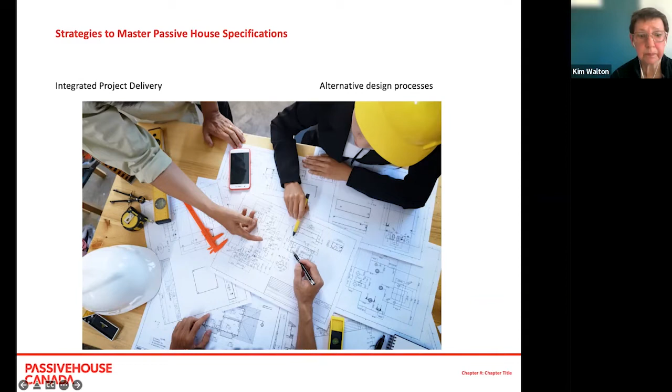That's a lot of words for just one picture, hey? So this is something that you have to get in your head when you're thinking about Passive House, that this is a whole building process. 1 + 1 almost never adds up to 2. 2 + 2 sometimes is 1.

Unless things are modeled, unless the energy modeler and the Passive House consultant is on top of all of the decision making all of the time, then problems can arise pretty quickly, and you can be well into a design where things are just going sideways, and there's some decisions that have been made that will destroy the possibility of a building becoming certified, if that's the goal.

So inexperienced teams might imagine that all that's needed for a Passive House certification is to add more insulation. Not true. And European windows and tape, and that ends the design process. And it's true, some of those things are used, and sometimes that's what we want. But the reality is that the design of the building has to be integrated. It's an integrated process. The Passive House consultant will make the initial suggestions for the success of the project, and will work with the team as well as the certifier in helping to guide design decision making.

So the active use of the PHPP or energy modeling process and software will let the team know if the project is on track for certification, and in the end, the specification of the materials will be key to the success of the build. So if something's not available, or we can't get something in Canada, then that's a big deal, and that's going to assist the Passive House consultant in the submittals, because in the end, if the project is being certified, there's an awful lot of submittals, and you need to know what the performance values are, and that is an important part of the certification process.

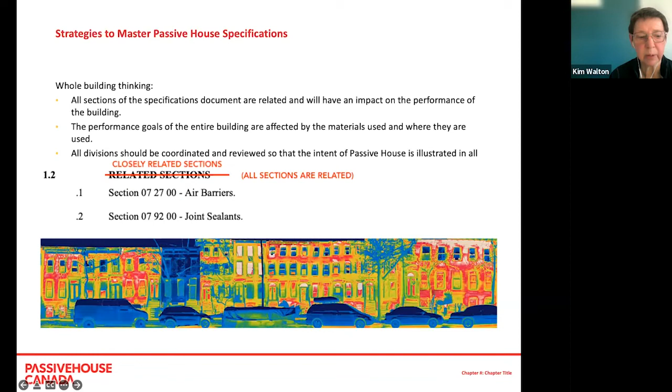And I'm just going to go back one. We want to be the blue building. That's the idea. This is about thermal bridging. This whole photo is showing a block of buildings that are just not performing very well, but the blue building's doing really well. That's what thermal bridging is all about. But how do you get it? You can't just specify no thermal bridging. That doesn't happen. But some of the materials that get you there are the important part.

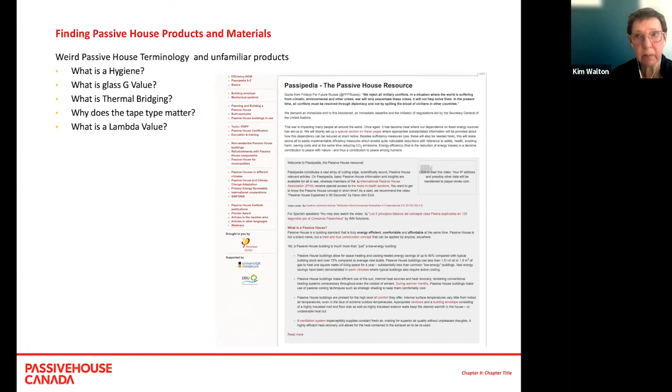Why does one tape matter over another tape, and what is a lambda value? So some of those things are very difficult to explain. I'm not going to explain them all well in this conversation, but there are resources, and at the Passive House Institute, there is something called Passipedia, and that's where you can hunt and look for some of these terminologies so that you can better and quickly understand what they all mean.

So just because I brought up some of those terminologies, I think hygrothermal is the most kind of weird one in the English language, because we think of hygiene as something completely different than what this is. So it's not about washing your hands. It's not about cleaning things, but it's about condensation, and it is a very important part of considering using the right products so that we are not creating conditions that would promote mold growth.

The G value has a different name in North America. We call it a solar heat gain coefficient, but it's really talking about the films that are on the glass and how the glass performs in the building.

What is thermal bridging? I think I gave you a little example in an image, but this is the technical example. And if you really want to know what the formula is, there it is on the screen for you. And why does the tape matter? It really matters because some of it's permeable, some of it's not permeable, some of it has an acrylic backing, and sometimes a tape matters much more in one location than another, and one type of tape in another.

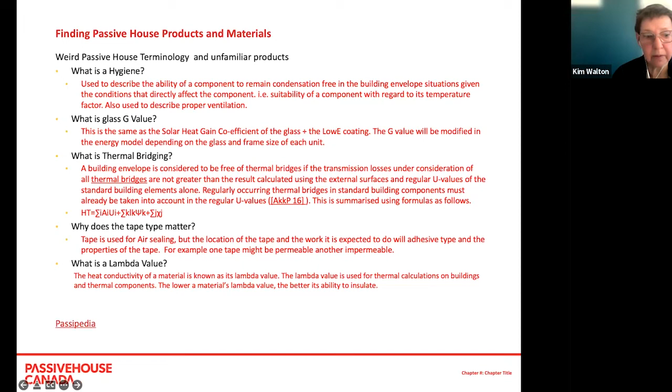And that's what you depend on the energy consultant and the experienced team members to let you know as a specifier. The heat conductivity of a material is known as a lambda value. And it's so important to know what the lambda value is if you're doing energy modeling. And it's also going to be important to know when you're specifying some materials, because it's going to be part of the whole assembly and part of how we certify a building.

So when Lori and Kelly and I started talking about this, the first thing that came out of, I think it was Kelly's mouth, was what? And what is this? And what? And that's really the big deal. So if you're thrown into a project and you need to find materials, how do you find these materials, and what does all of this mean?

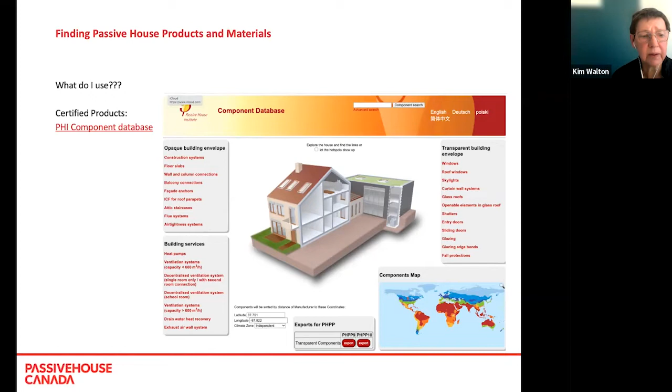So the easiest thing to do is to go to the Passive House Institute page, and there is a component database, which is really pretty easy to use. And there you can find components that are certified, and it's the best place to start, even if, and I'll talk about this later, not everything is certified, but this is the best place to start, the component database.

And I've just selected some components of a building, and these have to do with keeping cladding away from the building and doing some of the thermal bridge free construction. And I was looking in this search for some things that are available in Canada. So it is completely possible to sort for things that are available in Canada. And then you can also search for the climate zone. So the climate zone where you are, in Nova Scotia, is cool and temperate, and where I am, it's cold. So you can sort based on those things as well.

And then you can find these products. This isn't always the case. You might not be able to find something that fits the climate zone and the location, but this is a good starting point. And then this is the kind of information that you get when you click on a product. So it's giving you the component ID and the manufacturer and the quality, all of those things. These are important parts of specifications for certification. So that's why you want to find this information.

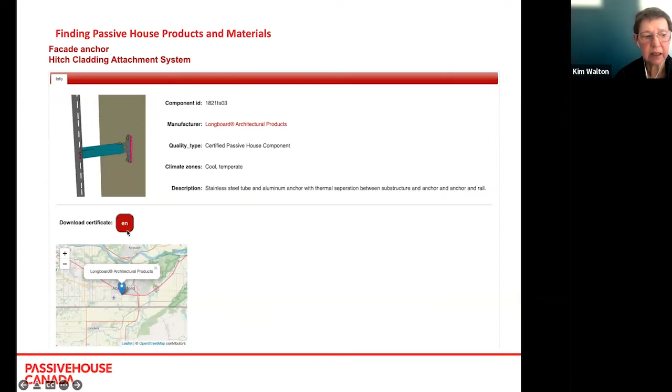When you click on the certificate on this site, then that gives you this certificate, and this is what you want to hold dear in a file. The certificate gives you all of the information that is actually needed when you do a compliance or when you're doing certification. It'd be part of the folder or part of the information that's provided.

But what might happen is that you may not be able to find a certified product, but something that's close. And what you want to do is prove that this product is going to work in your climate, and in that case, if it's not certified, this is the information that you're looking for from the product and from the manufacturer in order to have it part of the certified building.

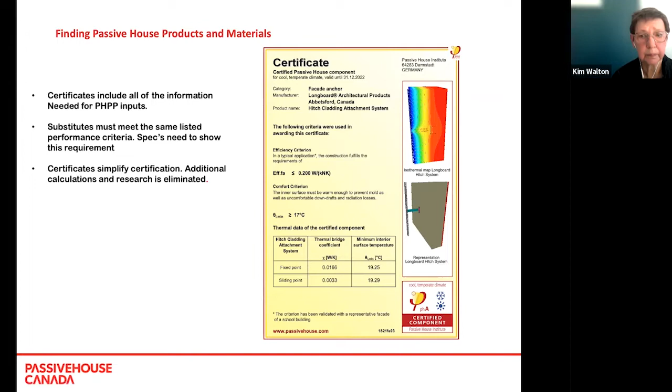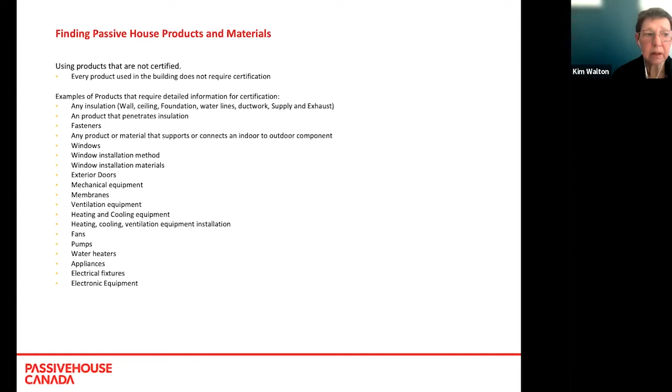So more about finding products. Not every product is certifiable or certified. These are some of the examples of the products that require detailed information when you're going for certification for Passive House. And this is a long list. This is just a partial list. But these are some of the things that we need to find the performance for. And maybe a quarter of them may not be certified when you're doing the application, just because you can't get the product, or it's not made in North America, or all kinds of reasons, one of them being budget, of course, too.

So for uncertified products, third-party testing is required for energy efficiency and for the performance, that they're climate appropriate, for the thermal resistance and the permeability. The information that the certified products provide is a reference for acceptable alternatives, and this is the information that's needed by the energy advisor for modeling. So this is where the energy advisor is leaning on the certifier or the specifier to help find these products.

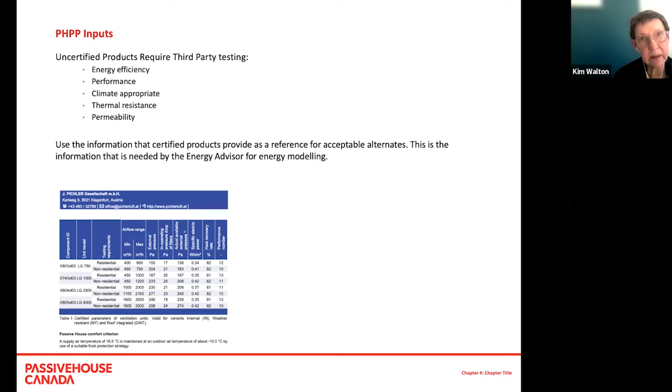So this is an example of a ventilation unit that's not available in Canada, and the certification will require the same information that's laid out in this particular certificate. So this might be an ideal ventilation unit. Can't get it in North America, but can we get something that's similar? The hunt is on.

So I've got this list of places to find some certified products, and we can put the links for this in the chat. But these are good places to start to search for products that work for certified buildings.

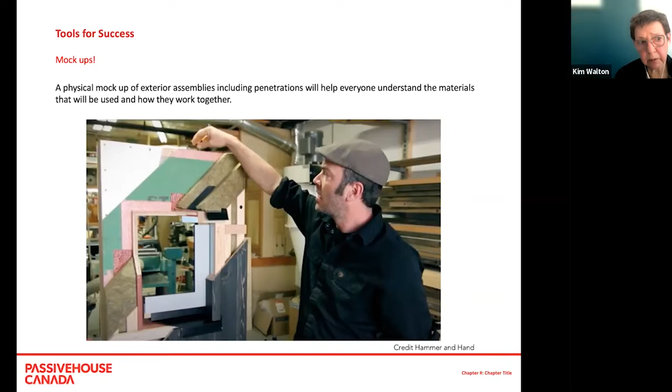So some of the other strategies, for anybody who's working on the project, this is advice for having a successful project. A physical mock-up is such a good idea. This is a great mock-up. That's why I took this photo showing all of the layers, because anybody on the team can see this mock-up and understand how everything is affecting everything else for this window installation. It's a really helpful visual for everybody on the team.

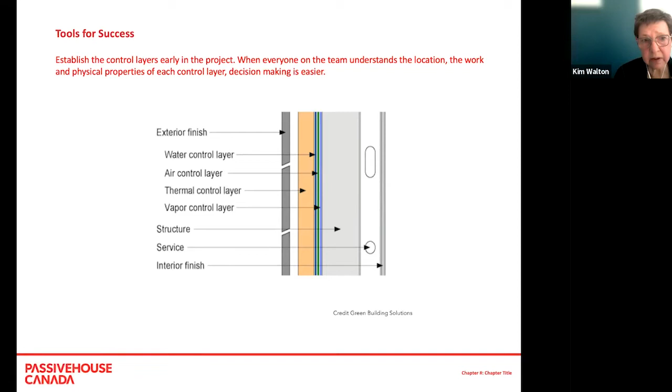So this is a drawing, which is as good as the mock-up. Well, maybe not as good as the mock-up, but this is a very simple drawing of the building assemblies, with the control layers throughout the building wall section, and that is really helpful for all the team members, top to bottom, to understand what the strategies are in each one of these wall assemblies. So this is not applied necessarily to one section. It's just a big drawing with big letters, with nice colors, and easy to identify the different layers.

This also, same approach. I've included this one because it's from a project of mine, and this was what we used for that same strategy. We used this with the engineer, with the architect, and with all the details that we developed for the project. And it was used as a guideline for on-site construction. And it changed, so this would just get reissued with a strikeout through the part that changed. It's part of the drawing set, but it wasn't really part of the drawing set. This was issued before we had the construction drawings. It helps so much to have something so simple that we can keep turning to understand the direction of the project.

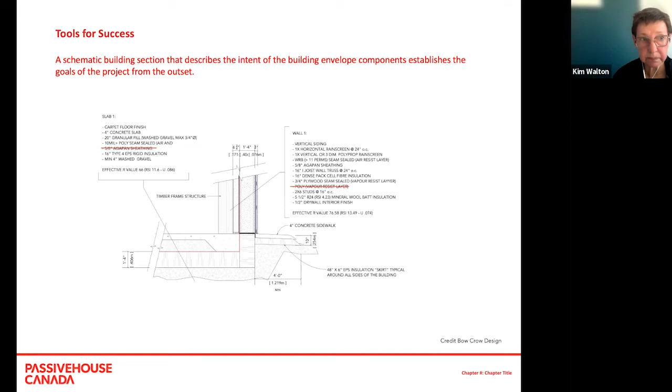So here's some notes. I'm going to read them out to you. In Division 1 specifications, include a clear description of passive house requirements for certification, and any special concerns for the project. Roles are clearly identified for the project. So who's responsible for what tasks? And every team member is responsible for checking and confirming other people's specifications work with other sections of work. So important.

Training requirements for site and the CM team are listed, and opportunities for site training and trades training. So understand that everybody that's going to be involved in a PH project doesn't know about PH. They haven't been trained in it. Everybody who knows even a little bit is a mentor. It's how we're going to help everybody to understand how to build better.

Specific air tightness strategies and testing protocols need to be specified, when they're going to happen, and maybe even a flow chart of what if this happens, then what do we do next? So if there's a failure in a blower door test, what would the next step be? And if we have success in the blower door test, what the next step would be.

Include a commissioning plan, the thermal bridge strategy, which can be demonstrated through simple drawings so that everybody understands it, and documentation of who's responsible. And there should be a Division 1 spec for responsibility specific to passive house. So remember, there is responsibility for everybody, but everybody's responsible for everybody else.

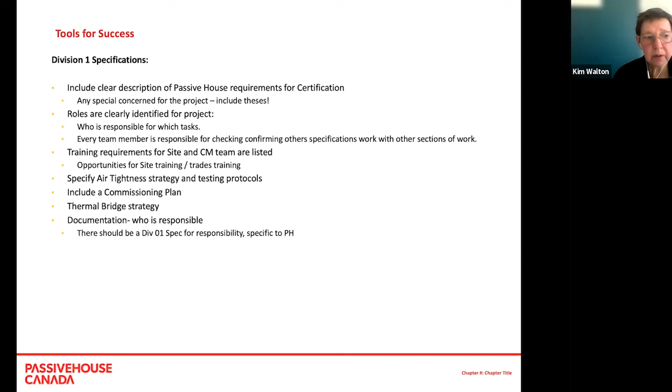Okay, so particularly important specifications when you're writing out specifications are 07, the thermal and air sealing sections, and the windows, doors, and glazing, and the mechanical and electrical. So are all of the relevant sections coordinated for accuracy in the project specifications? That part is a question, and that is something that we just need to be sure is checked. And each relevant section for passive house should have a statement for passive house requirements.

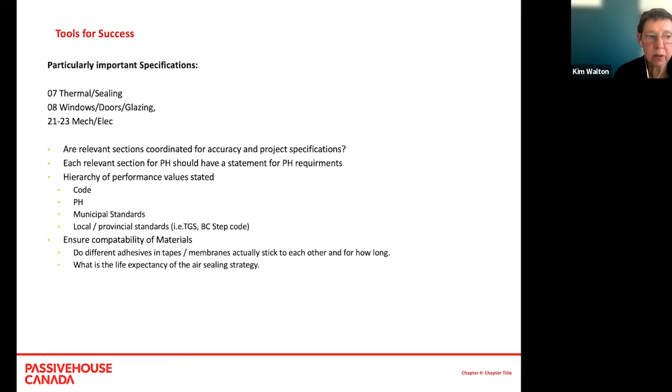And the hierarchy of performance values are stated, so how these components fit in this hierarchy. And ensure the compatibility of materials. So this is a tricky one and a sticky one. Do different adhesives and tapes and membranes actually stick to each other, and for how long? That's a pretty important one, and it's one that might surprise you.

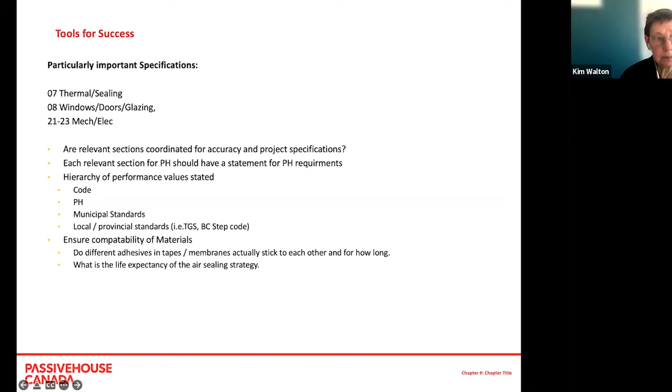And what's the life expectancy of the air sealing strategy? Certain tapes don't last very long, and some materials don't last forever. Some materials we thought lasted forever don't last forever, and when you tear buildings apart, you find that out. So the right product for the right place. So does everybody understand the PH requirements, and have all the consultants coordinated with other disciplines?

This just reminds me of a story of a project I was working on. So mechanical was done, and it was handed off to somebody who was doing the mechanical drawings. And there were some issues with the way that things were put into the drawings. There were a couple of mistakes or things that we needed to change just for compliance for PH. And it was up to me to talk to the person who was doing the drawings and help them understand why we wanted to make these, to him, weird changes, because he didn't understand passive house at all, didn't really understand what the goals were.

And so we did get through that. He became pretty interested in what we were doing. Then I just pushed a little bit more and said, maybe you should take a course. Maybe you'd like to know more. Would you like me to give you some references? And he backed off. He didn't want to have anything to do with it. But he was pretty interested, and it wasn't that it was difficult to get him to make some changes.

They weren't too weird, but there is some tendency for people to just think, well, whoa, that's way too much for me. That's too much information. I don't need to know it. But the more we ask, the more we nudge, I think the better people will understand what the end goals are. Consistent and regular coordination meetings, super important.

Can't say this enough: regular meetings may seem like a waste of time, or we don't need to do this, but something always comes out at regular meetings. And if the meetings are short, that's not a problem. But often they end up being longer because we end up talking about things that we didn't know were an issue, or that we didn't know we didn't understand.